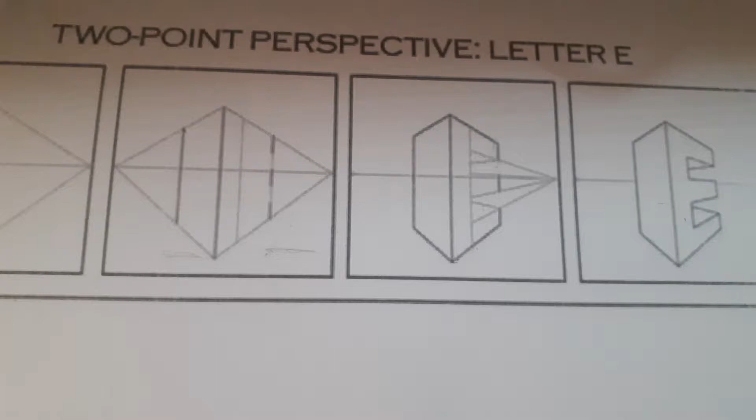Okay, so let's work out the first exercise together. This, remember, is part 2 of the video. Now, let's see where the horizon line is placed. This is the horizon line, remember, because the VPs are always on the horizon line, okay? The horizon line appears to be halfway through the page.

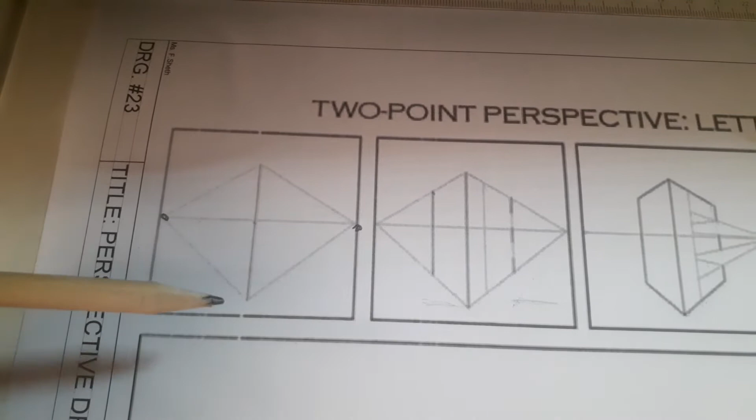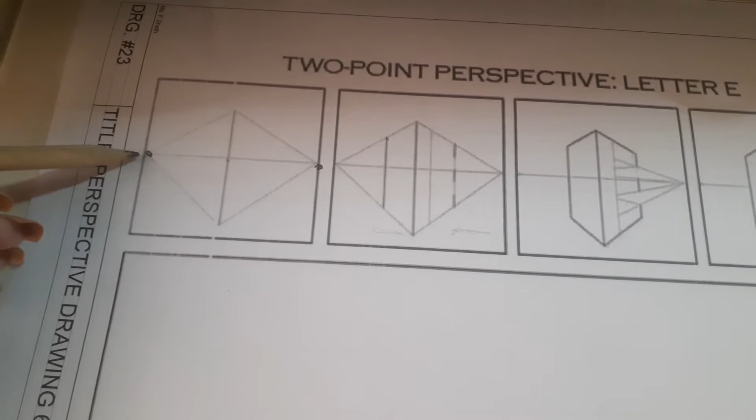Now, remember, when we have a 2-point perspective or 1-point perspective without measurements, it means you're going to take an estimate, okay? By ratio in this case, because this is much smaller, obviously, and you're going to take an estimate value, okay? An approximate measurement. So this is like halfway through the page. So I'm going to draw one over here, okay? I drew my horizon line, and here I'm going to label my VPs. I have VP1 here and VP2 here, okay?

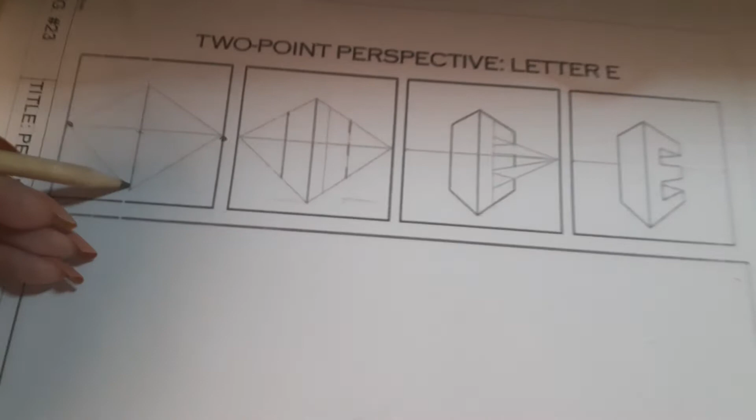Now I'm going to see this length, okay? And take it as an approximate measurement over here. I'm going to place mine here, okay? Okay, so till now, and then I'm going to place this straight line, okay? Seems to be somewhere in the center of the page. Okay, so now what I have is this part. I have the horizon line with the VPs and the straight line.

Okay, now I'm gonna do what's done here. From here, I'm gonna go to both VP1 and VP2. And same thing from here. I'm gonna go from here to VP1 and from here to VP2. All right? Oh, hold on. All right, so till now I have diagram 1. I've drawn this diagram, okay?

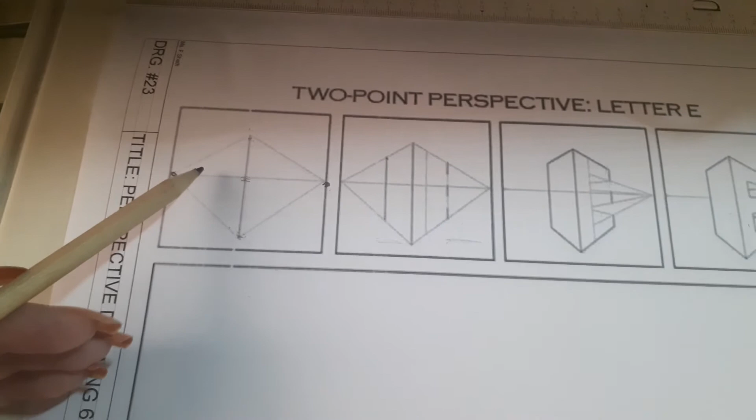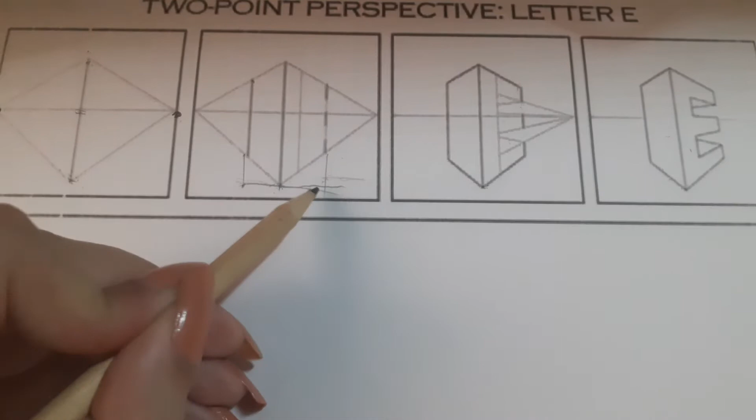Now I'm gonna move on to the second part. So imagine, take out 2 horizontal lines like this, okay? And just drop these down, okay? We're gonna take this at an approximate value and I'm gonna apply it here. I'm gonna mark it out here, okay? Then I'm gonna take this one as well, and mark it out over here, okay? All right, now remember this over here is my midpoint. The midpoint always lies on the horizon line, all right? So marked out the midpoint. Remember, these lines have to go towards the midpoint.

Now you can realize something. For example, I'm gonna make an adjustment, because here, if I take this line like this, look, all I'm gonna have space is from here to here. Now I want this a little bigger. So I'm gonna move this out a little bit. So if this happens to you, no problem. If you're working well, you should realize this from the beginning and take it out a little further, okay? I'm gonna do this here and do the same thing on the other side, all right? If you work in this method that I'm showing you, you'll realize a problem from the beginning, all right?

So from here, I'm gonna take it towards the midpoint, and from here towards the midpoint as well, all right? Now, where this line meets this line that's going towards the VP, I mark it out, okay? And from there, I'm gonna drop a vertical line, all right? Same thing here. Where this line that's going towards the midpoint meets this line that's going towards the VP, mark it out and drop a vertical line, okay?

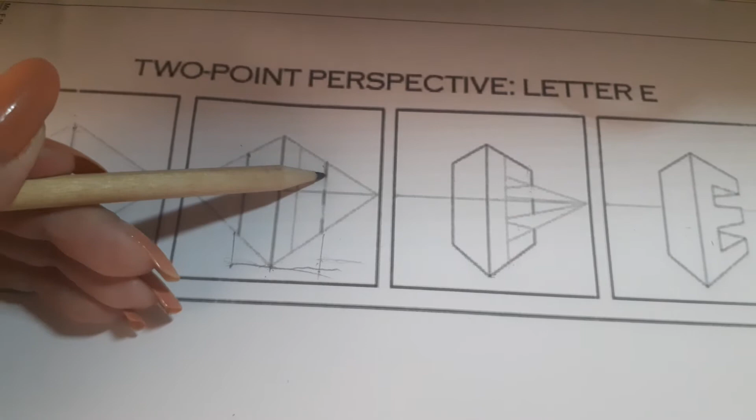All right, now I'm gonna make this part in bold because look at the diagram here. It's all in bold. So the back is all in bold. So I'm just gonna get that done. All right, so I have the back done. Now, this part, can you see it? It's split up into 5 parts. Look at it. Yes? Split up into 5.

So, I'm gonna take the length I have here, okay? And I'm gonna split it up into 5. Okay, this is 86 basically. Let's make it 85. 85 divided by 5, 17. So I'm going to split it up into parts of 17.

Okay, remember, when we're transferring straight lines from, say, this diagram to this diagram, straight lines always remain straight, obviously, and they remain from the same position, okay? So if I'm taking the straight line from here, it's gonna stay from here, okay? Like, for example, in the previous sheet, when the vertical line had to be from here up, I went from this side, and I went straight up, okay? I don't go from here, I go from here. I go from the true lines, okay?

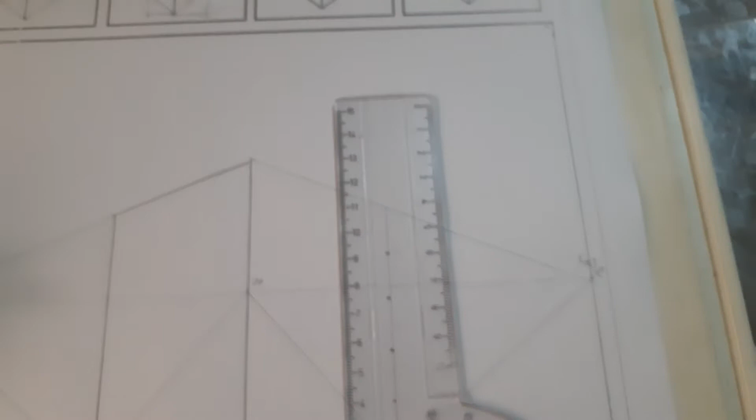So now, remember, lines that are gonna be drawn towards the right have to go towards VP2, and lines that have to be drawn towards the left, they go to VP1. We're gonna have examples of both these cases in this drawing, okay? So let's start with this one. This one, the first part, I draw it towards VP2. I go in and I go out, okay? VP2.

All right, so I'm gonna make these lines bold, 1, 2, and 3, okay? And I'm gonna make them bold from this side as well. Now, till here, we have the second diagram, okay? Now we're creating this one, all right?

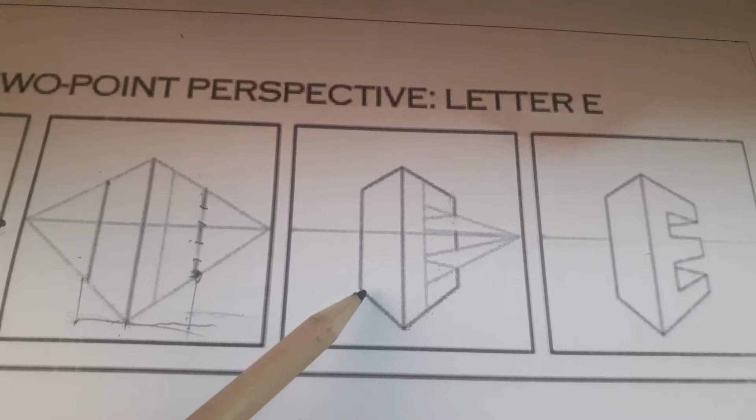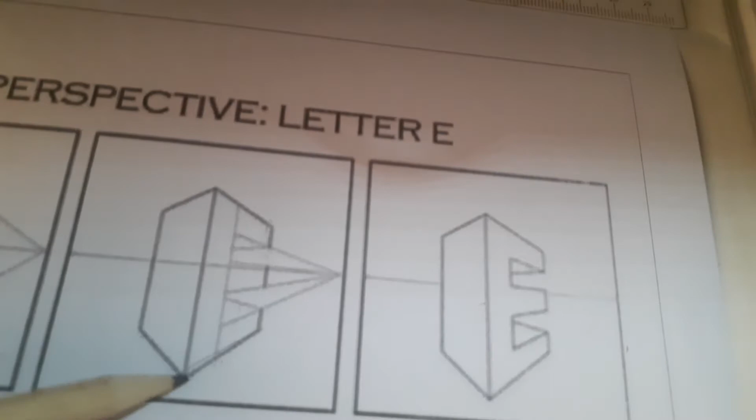Now I'm gonna make these lines bold, okay? These, on my drawing, I'm gonna make them bold, all right? And these, okay? These. 1 and 2, all right? Now, I'm gonna do this part. I'm gonna find this measurement, okay? So I can find this spacing.

So I take an approximate measurement for this part, take it towards the midpoint, and I'll show you now, come. So I'm gonna apply it here. Here, okay? I'm gonna take it towards the midpoint. All right, don't forget, faintly. And where this line meets this line that's going towards VP2, I mark it out, all right? Mark it out.

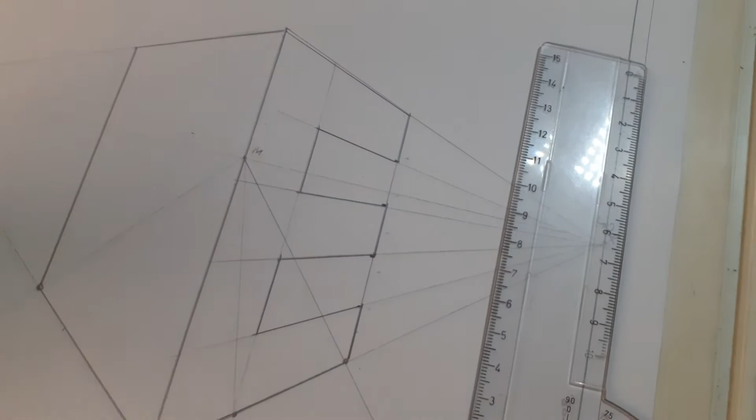Now, from that point, I go vertically up, all right? And now I can make these parts bold. Look, these parts. All right. Okay, now I have one final part to do, because look, this part of the E is empty. Where it's a block, I need to continue it. So these lines have to be projected towards the left, right? This line and this line and this line, they have to be projected towards the left.

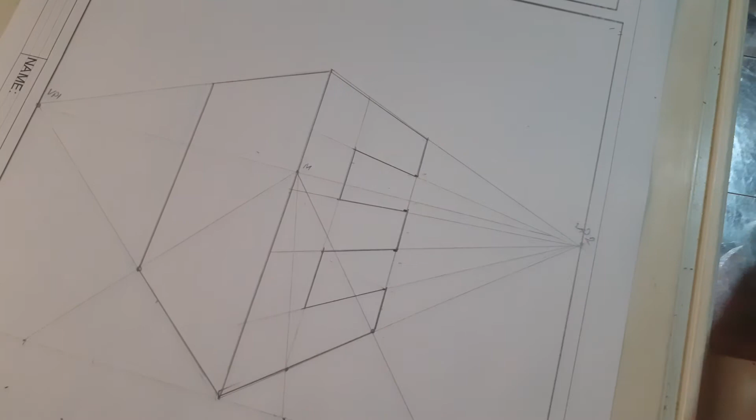So I don't draw a horizontal line, I take them towards VP1. Remember, with perspective, except for this line at the bottom, there are no more horizontal lines. They either go towards VP1 or they go towards VP2. And remember, this line at the bottom is used to set these measurements that go along here, okay?

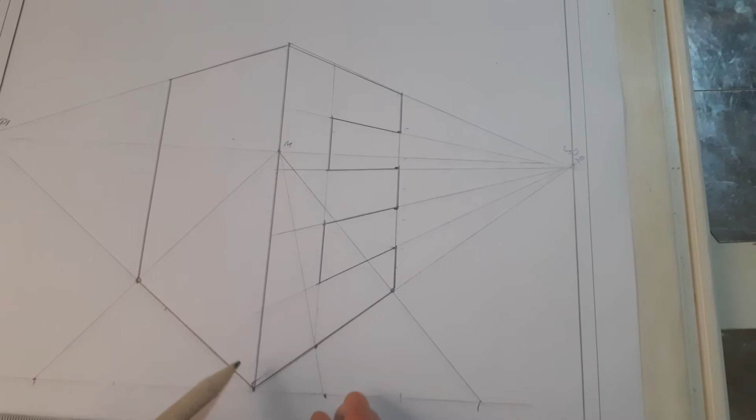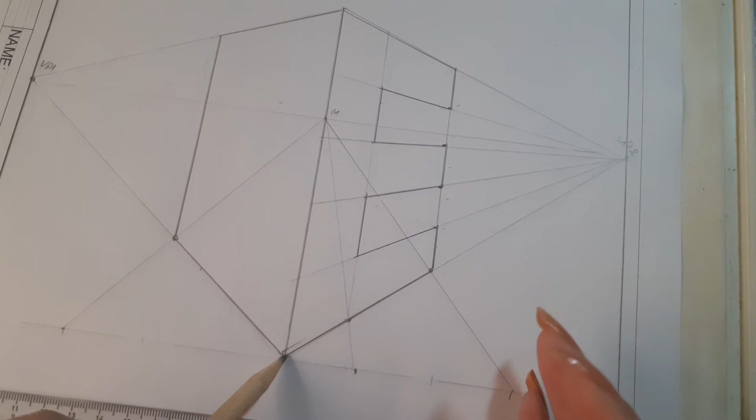So for example, when I needed this measurement to find this vertical line, I don't apply the measurement straight away on this line that's going towards VP2. First, I apply it here, okay? So say I had given you this measurement myself, and I told you it had to be 30 millimeters. You would not apply the 30 here, all right? You would apply 30 millimeters here, and then you go to the midpoint and then use the line you have here. You apply true measurements on the horizontal line, okay?

Now, we're gonna go from here towards VP1, okay? We're gonna go from here towards VP1 and here towards VP1, okay? And then just make the lines bold. You can make them bold as you're drawing the lines from VP1. Just be careful, you only make this part bold, not the whole thing, okay? And there we go. We have our E block, okay?

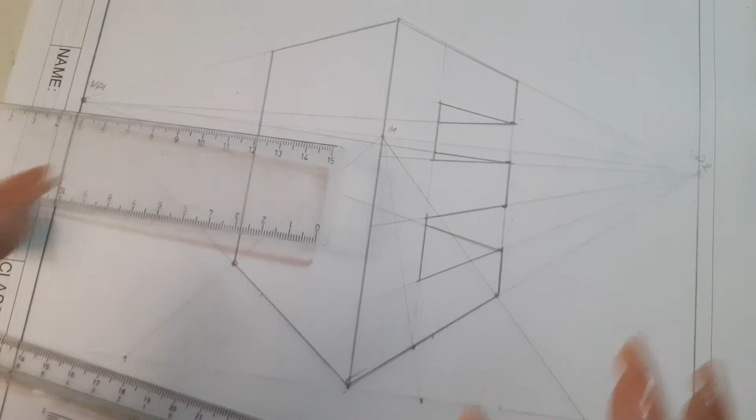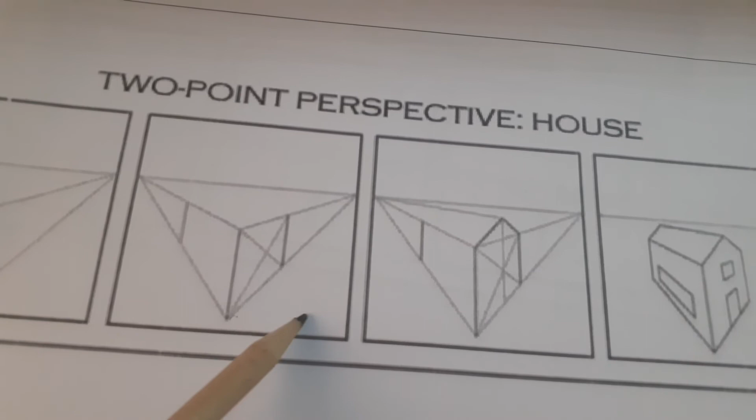So now, regardless of which sheet you have, could be this one, whichever they are, all rules apply to the perspective drawings. All the same rules we discussed apply in the same way to the other perspective drawings. Regardless of how complicated they may look, we always use those same rules, okay? For example, look here, if you want to split it up into two, instead of measuring on the horizontal line, you can just draw the X over here and you've split it up into two, okay? You can use those ideas.

For example, let me show you the first part of this one. So, the horizon line seems to be a quarter of the page in. So I draw it approximately a quarter of a page in, all right? VP1 here, VP2 here, okay? Draw this line wherever you need to. Okay, let's say I'm gonna draw it here. Okay, and you'd have these lines going up here.

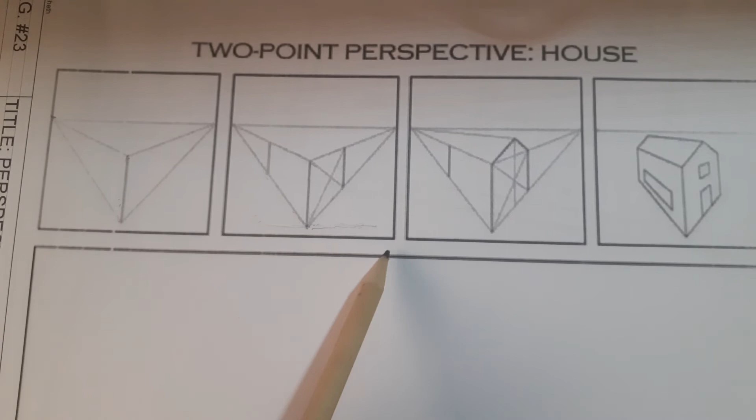All right. Now in this case, you could tell me, I can just take an approximation here because I don't have a value. But ideally, you still do this first so you get used to the system, okay? Because I'm going to repeat the same thing I said first. If I give you a value of, say, 100 millimeters on this side, you have to first apply it on the horizontal line, take it towards the midpoint, and where that line meets over here, you get this distance. So you don't apply the measurement I gave you here. This comes later. You apply the measurement I gave you here. Okay?

And remember, after you apply the measurements here, okay, let's say these are the measurements we're gonna use. We're gonna use this one here and one to here, here and here. You still need them. Why? Because you need to draw a vertical line up from here and a vertical line up from here, and then you have to measure the distance in between and find the midpoint, because you need the midpoint, okay? And then you carry on as per normal.

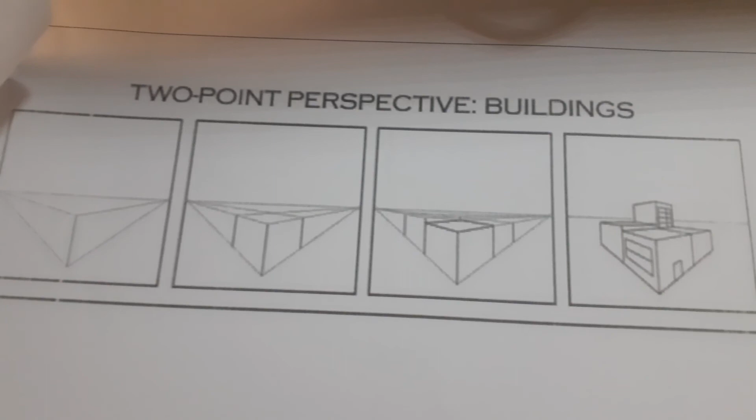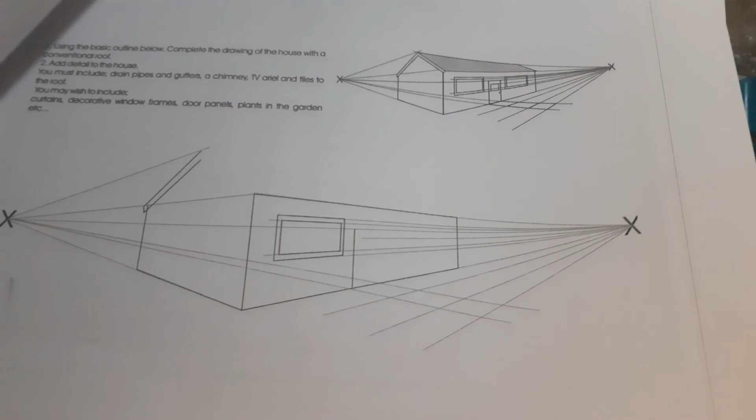So regardless, whichever one you're working on, it could be any one of these, the same rules always apply, okay? Regardless of how complex they might get. Now these, for example, for the circles, you're not going to use any compass method with them. You're just going to sketch them on, okay? Like I said, this one started for you, for example. Regardless of which one you have, the same rules always apply, okay? This one works by ratio, okay? So you take, for example, the spacing you have here, compare it to here, and split them up into the number of parts required, okay?